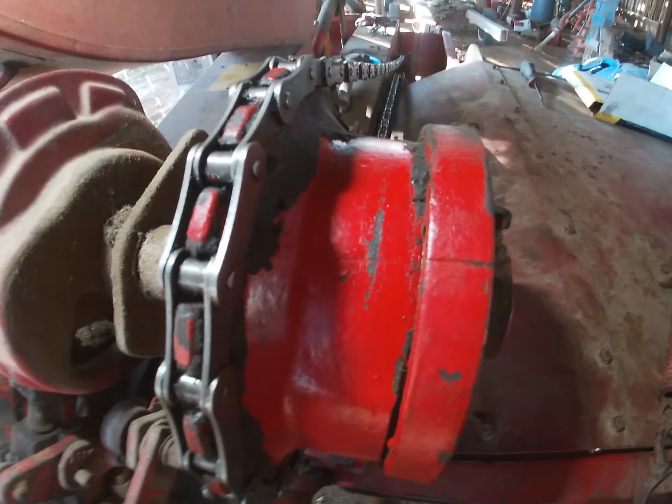I want you to look here. We finally got the son of a...

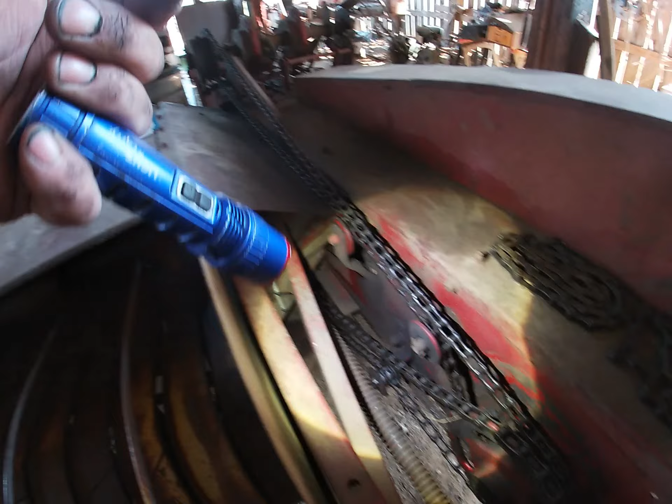And then this one, what is this one even? A 50? Don't say. Now I gotta look. 2050. So yeah, that's what I was gonna do. I was gonna replace the one for the pickup drive here and this one. I could possibly take a link out of this, but I would just as soon replace the whole chain because, well, then I'll know what I got.

I was having a little bit of issues late last year with knotting and whatnot, so timing was a problem because we busted a set of needles that already went to the scrap. So anyway, we are going to make sure that we get this. We're going to replace this chain right here.

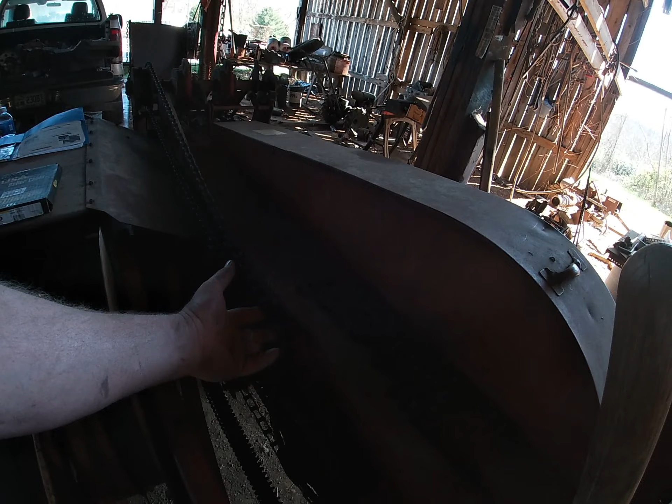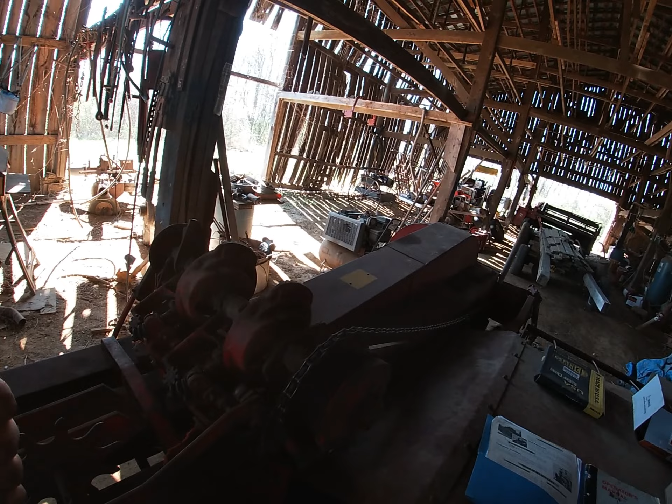I brought the manual so I can figure out how to time it, because I know we'll have to time that. We busted a set of needles, so there you go. It was out of time. And that is the chain that drives the knotters. So anyway, next up, I gotta read the book and tell you how to time it.

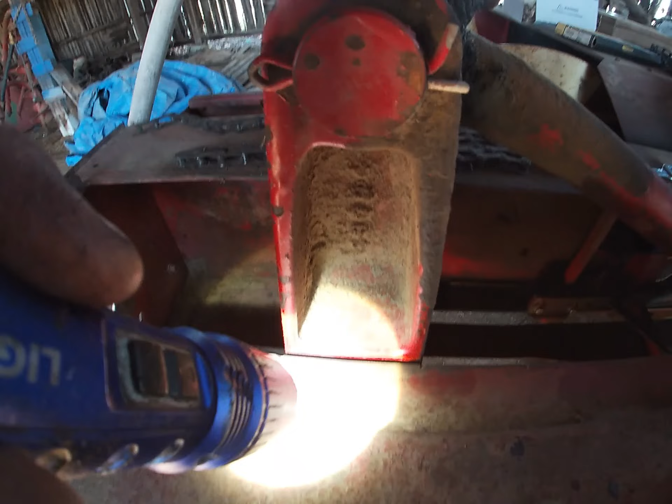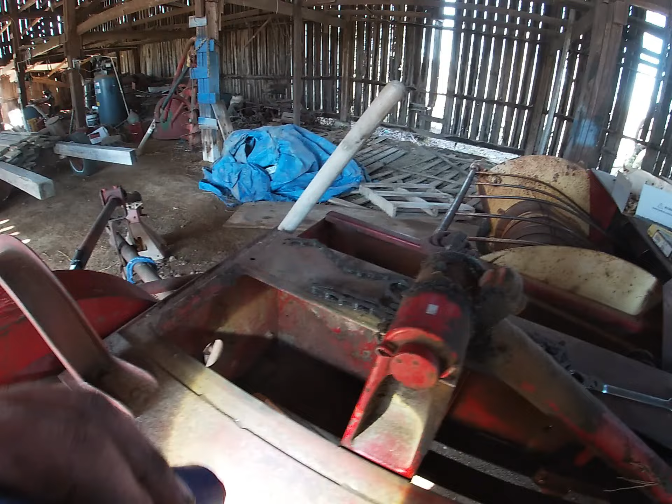All right, so step one, remove the knotter drive chain, which I did. And then place the crank here in this position between, hopefully you can see that mark and that mark. So we're pretty much between there. I used this old tobacco stick and jammed it in there so it wouldn't turn on me while I was messing around here, because I don't want it to turn. That would be bad.

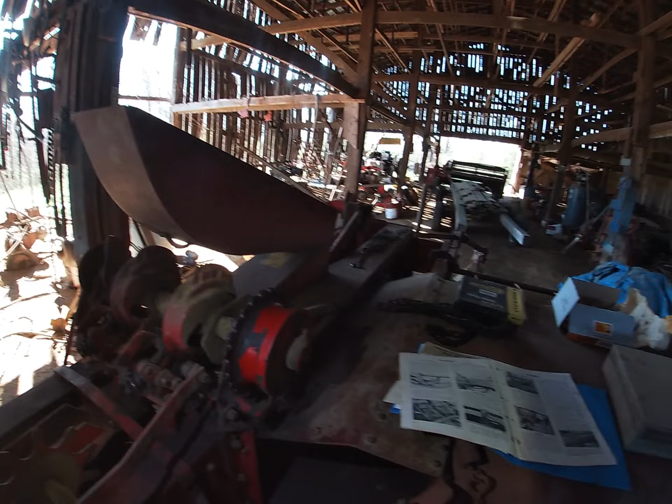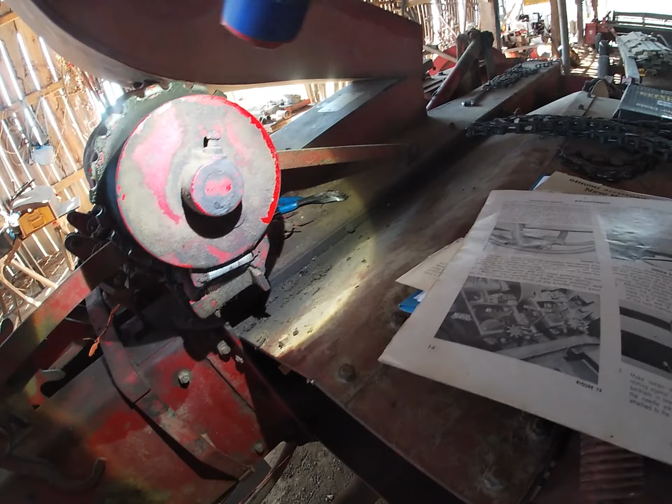Then what's next? Make certain that the knotter clutch pawl, that piece right there, is against the knotter stop. So it is, it's right where it's supposed to be. When you get your length of bale that you want, it trips and then lets the knotter clutch rotate, okay?

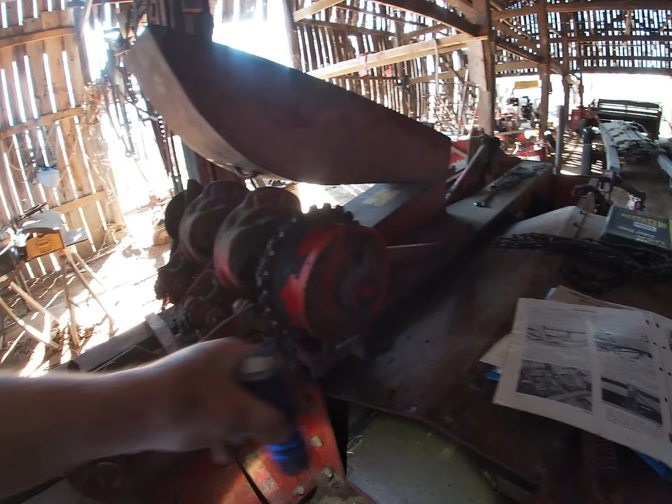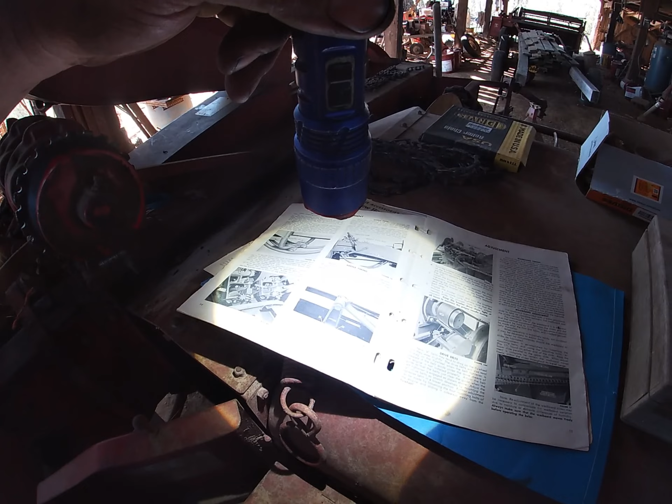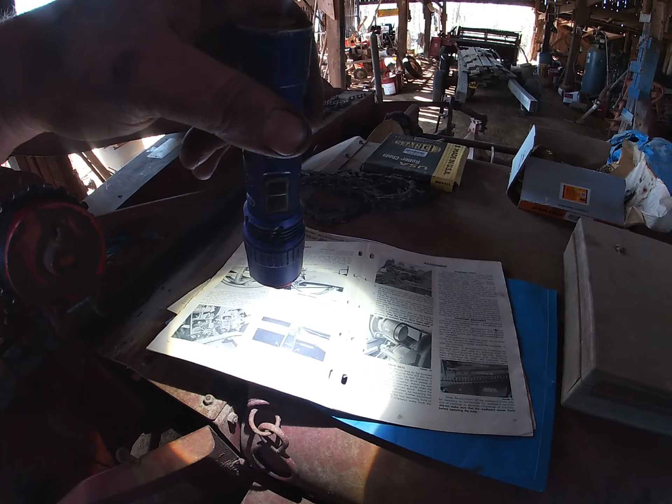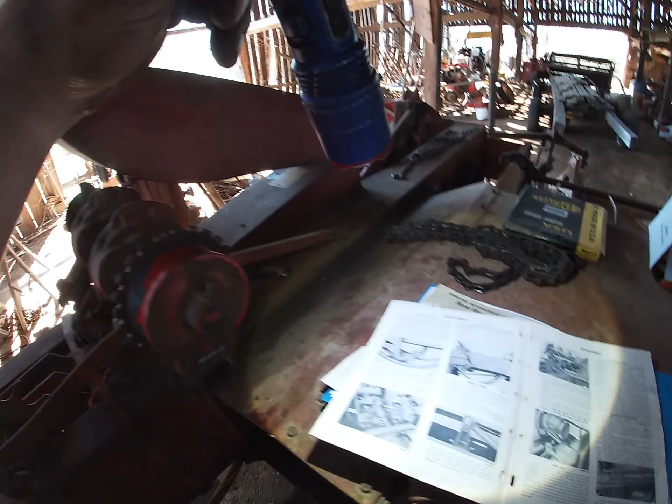So, remove the backlash in the knotter clutch by pulling upward on the needle yoke rod at the point where it is attached to the knotter arm. Knotter arm needle yoke rod is up here. Okay.

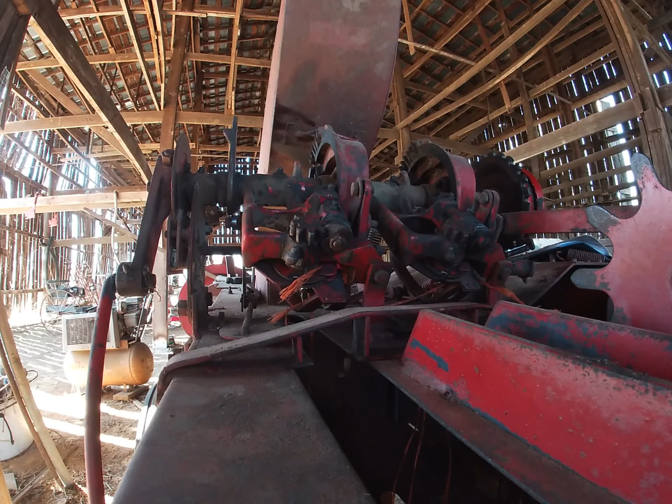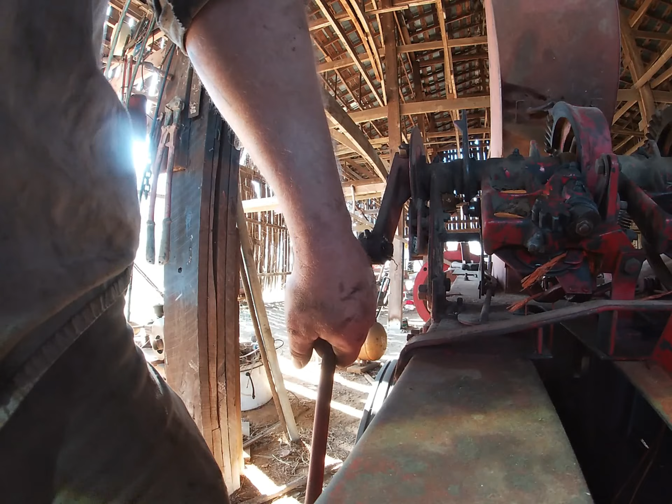So it says pull up on that. Yeah, I'm kind of learning this as I go because this one is different. So, okay, so that should be backlash removed from there.

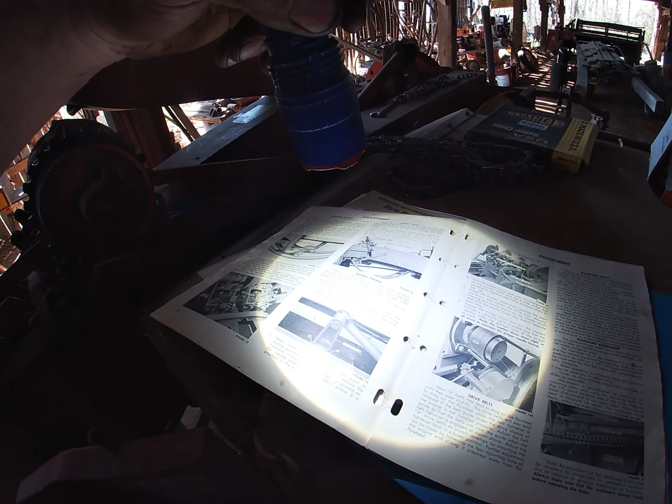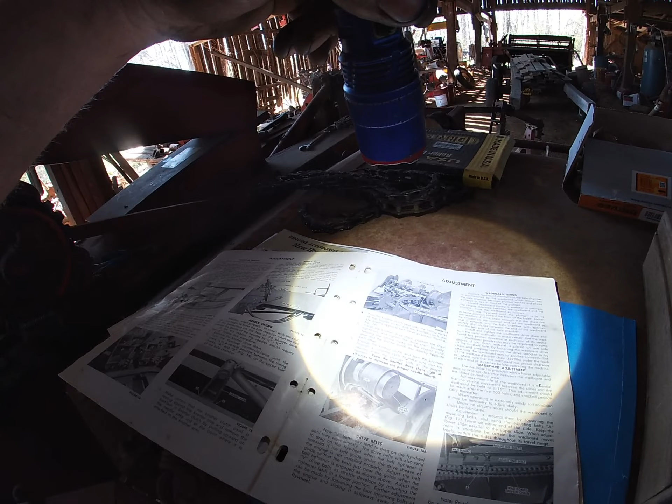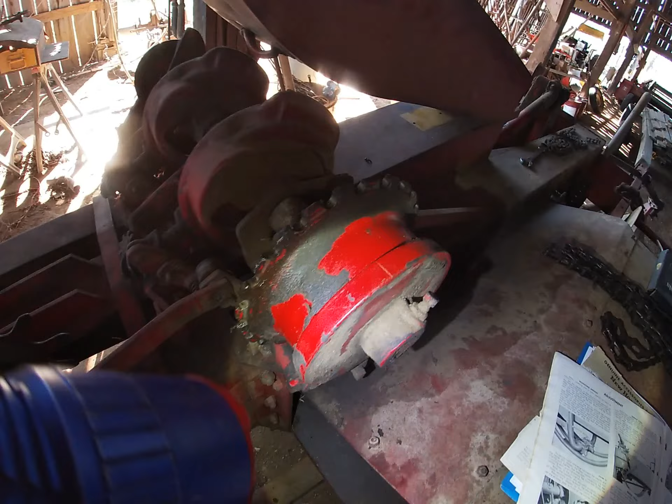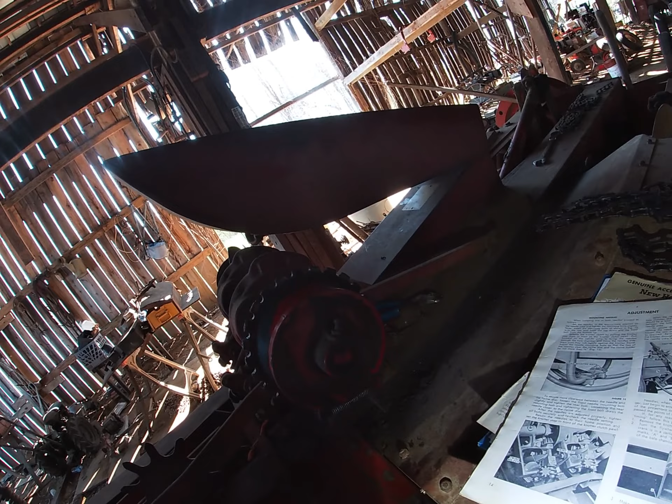Turn the knotter clutch gear until the timing marks of the knotter clutch and the knotter clutch disc are directly opposite of each other. So we're going to line up the timing marks like it shows in this picture. So anyway, there's one mark. And does it say which way? No, it didn't. So anyway, by looking at their picture,

well, let me find this. Okay, so marks are aligned. Should probably get a paint pen so we can see that better. Well, you guys can see it better without the light. But mark. So marks are aligned.

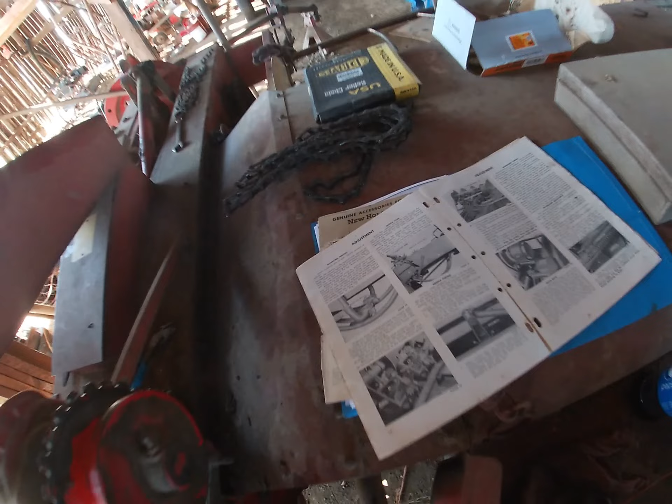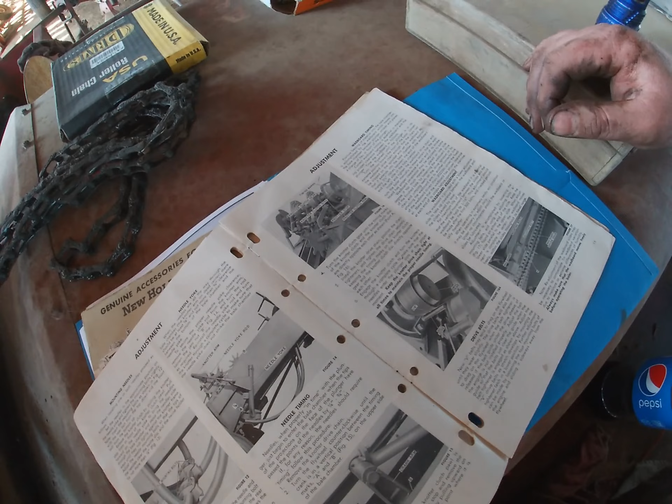Install the knotter drive chain. Position the chain tighteners and tighten the drive chain securely, keeping the timing marks on the knotter clutch gear and the knotter clutch disc directly opposite of each other. Okay, so now I need to put the chain back on. That's fairly simple for timing one of these.

Actually, I've seen, I don't remember what model New Holland baler it was. I think it was a 315 for some reason.

That, you know, it had to be within 1/4 of an inch of something, and it's like, okay, that's lovely, but whatever. So yeah, next up for me is I got to put the knotter drive chain back on, and then we should be able to cycle it and make sure nothing's hitting as long as everything stays in time, in theory, right? So then I got to make a chain, which we might cover that process another day.

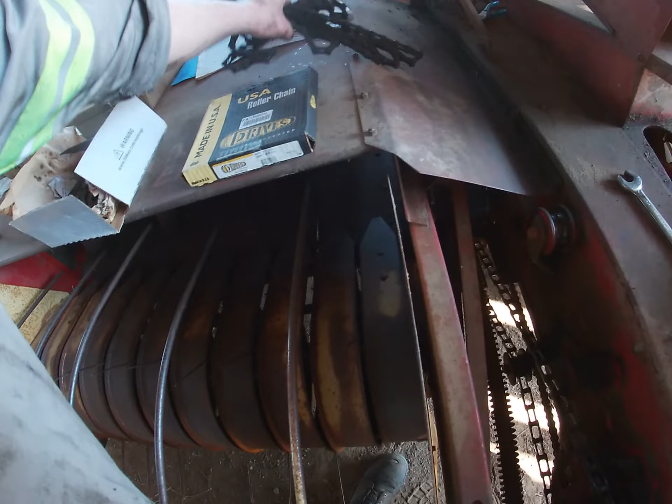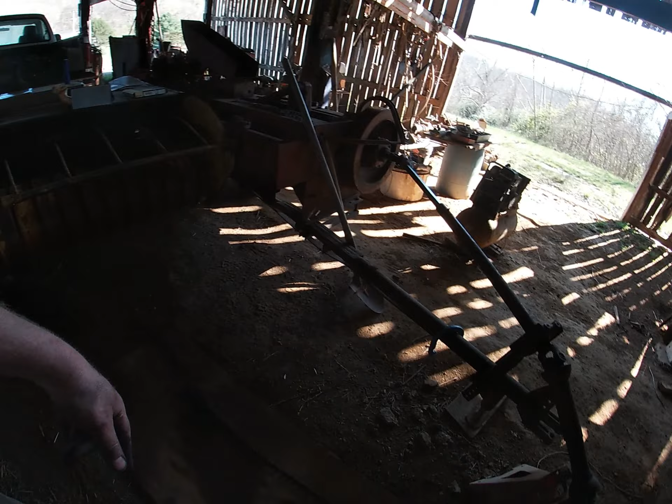But anyway, we're just gonna lay them out on this board here and count the links on the old one, which is this one, and then get the new one and count it out, and hopefully we don't have to add to it, but we'll see. This is a 10-foot, or well, rolls of chain come in 10-foot pieces. So anyway, may use that. That's longer, be easier to deal with.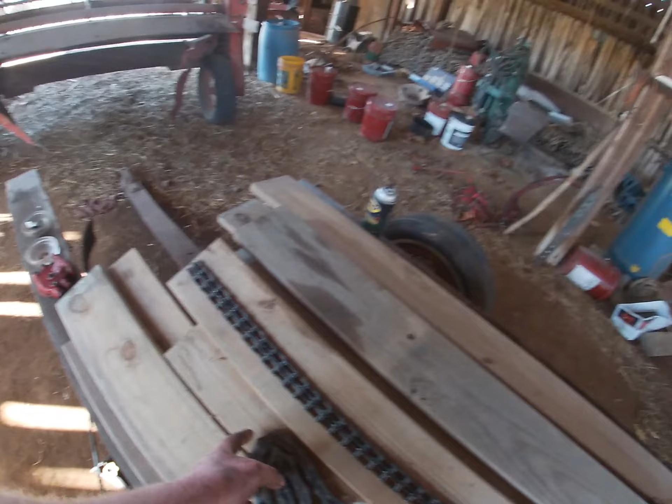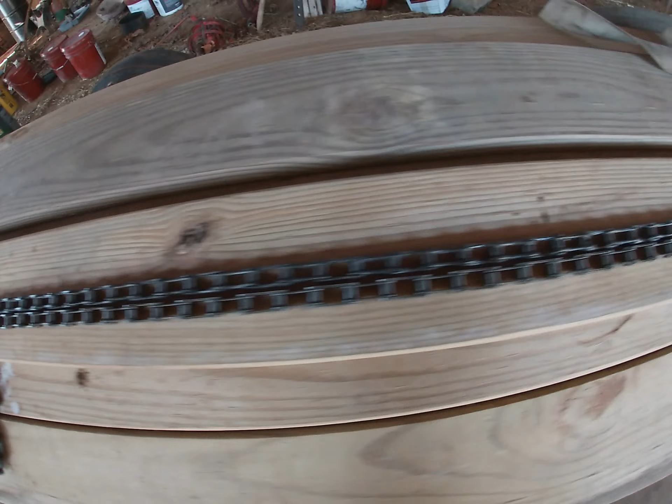Okay, so just a quick point about chains. You can see that's in line right there. And then the farther down the chain we go, the less in line it is between the old chain and the new chain. By the time we get down here to the end, it's a full pin width off. That's how much wear was in that chain.

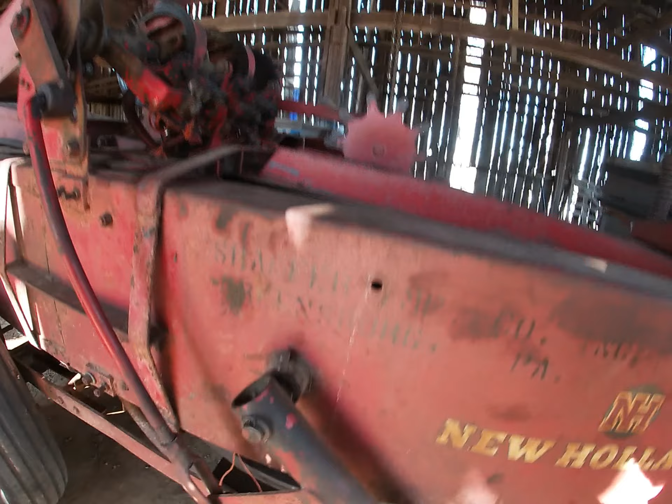I'm not knocking it at all, because I believe, anyway, if I can find the red paint on it, there's red paint on this old chain, so it may very well have been the original chain. Matter of fact, I pretty much guarantee you it's the original chain, because this is the original paint on this baler. If I can find, okay, here it was stenciled where it was shipped to originally. Shaefer Implement Company Incorporated in Greensburg, Pennsylvania. Hopefully y'all can see that.

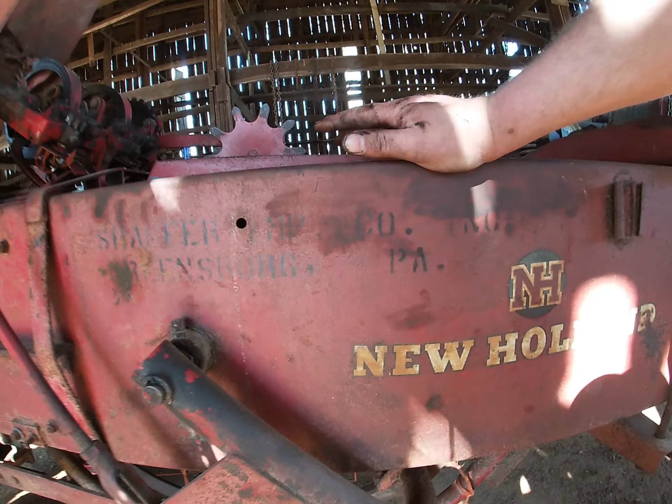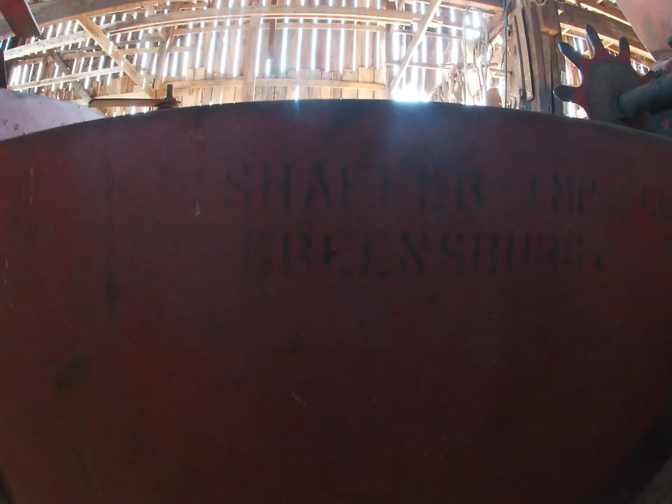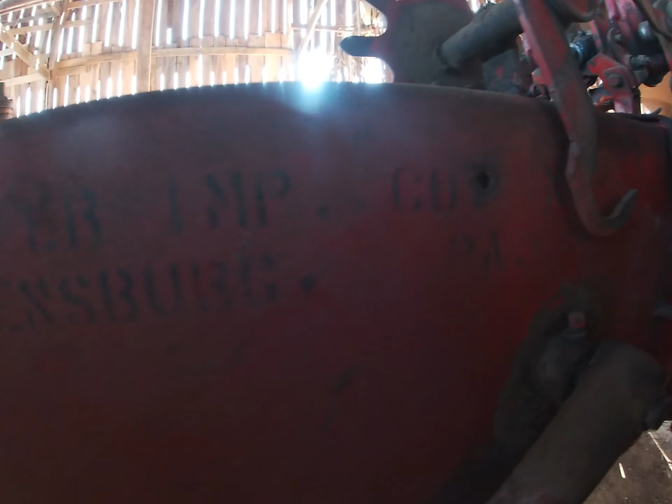For something that's come out of the late 50s, I'd say it's done pretty well for most of its life. I think the stencil on this other side is even better yet, but probably not as visible because it's dark over here. Well, anyway, let's see. At least I think I'm spelling that right. Maybe it's Shafter, I don't know. But anyway, you can see it. Shaefer Implement Company, Greensburg, PA. So, I brought that up in one other video that I've done about this thing.

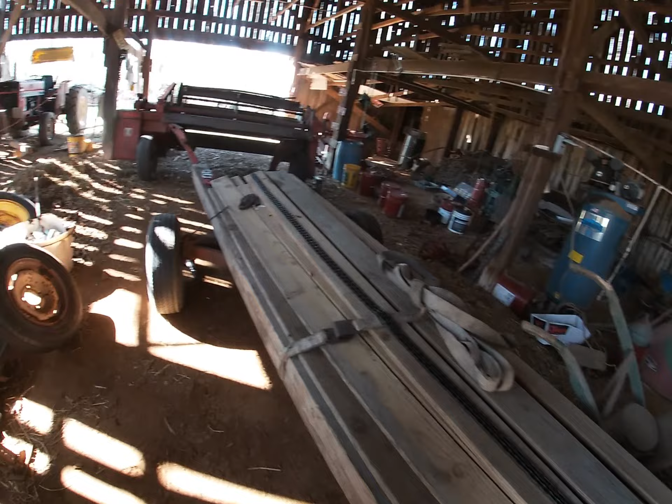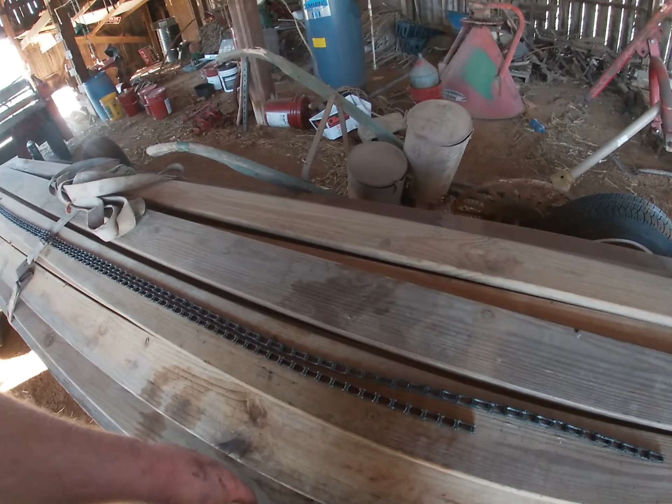But as I said, that may well be the original chain, and if it is, it's survived quite well over the years for what it is. But being that much extra slack in that chain, and as loose as it was with the tensioner pulled all the way up, well, we were having problems. So hopefully this will solve it. And yes, if you hadn't noticed, I am going to have to add to my chain. We're going to go back with counting links. Don't ever measure a chain, because you'll end up with too much chain and have to put a half link or take a half link out. Count the links on a chain, because that way you know you got it right.

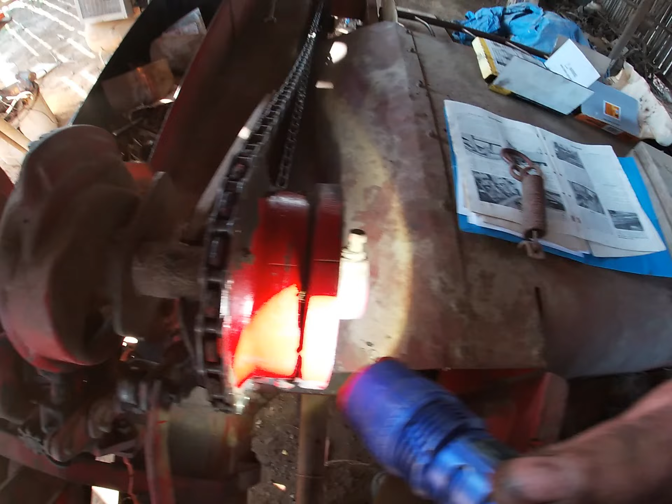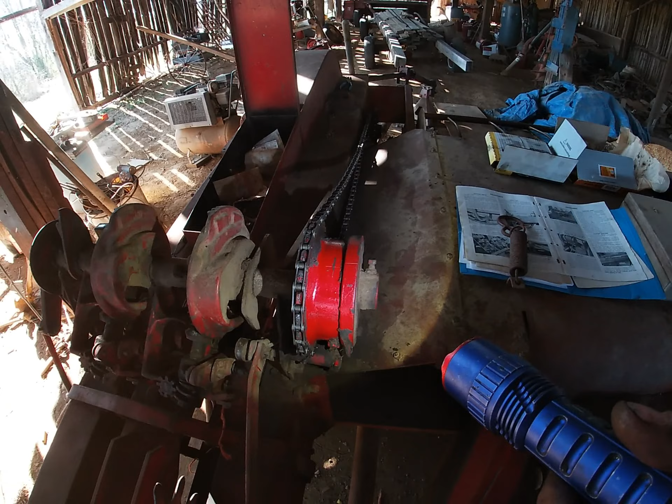All right, so we got our new chain installed. I have not adjusted the tensioner yet, but it's installed. And our marks are just a little bit out of line there, so that's good, because when I pick up on the tensioner, it should pull that the right way, I think. If not, then we'll have to split it and jump it a link and then tension it again and play with it until we get it to where it lines up right. Let me tension it and see what we get.

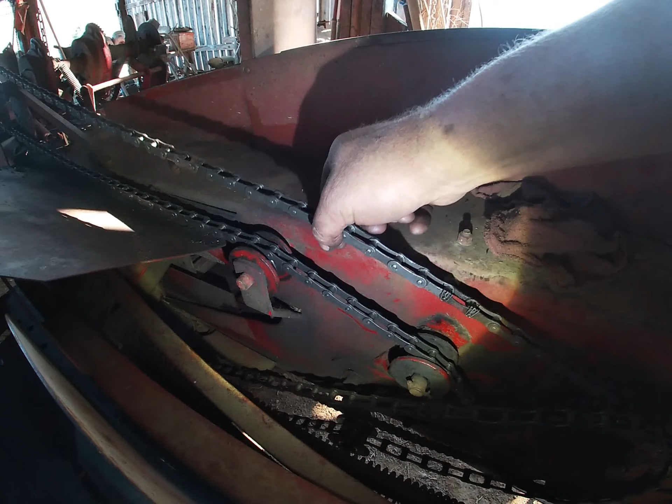All right, so I got my tension where I like it. There's still a fair amount of slack in the chain, but it's not going to jump a tooth or anything like that, so that's good. But of course we have a problem. Imagine that. There's always got to be a problem, right? My timing marks didn't line up. So we're going to have to pull this ahead, skip it a tooth, basically.

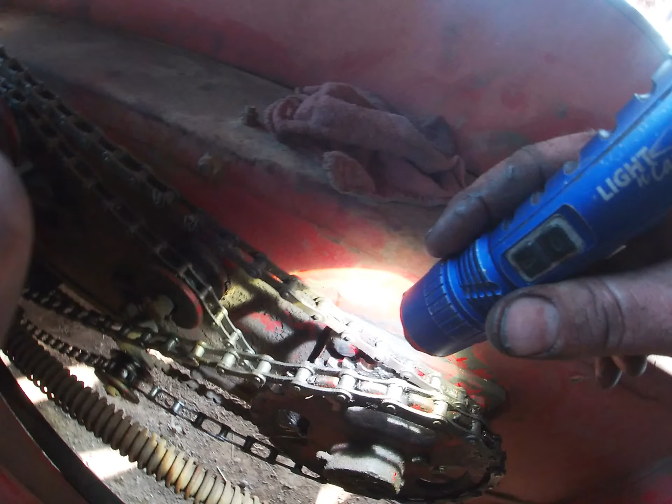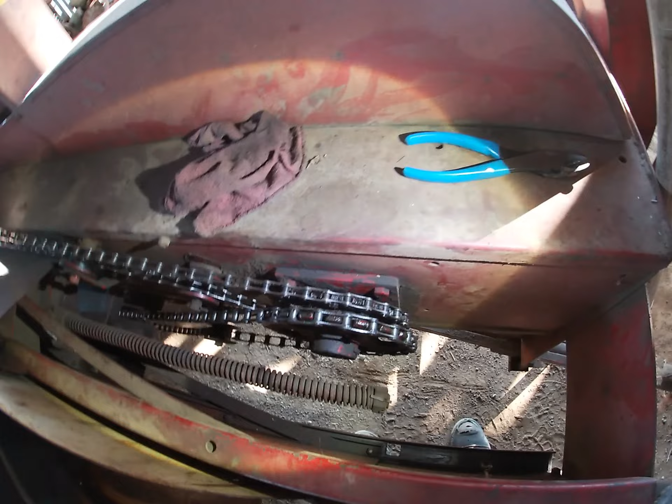But the one thing about this 2040 chain, or well, about the way this one's set up on this end, is this is a regular old number 40 sprocket. It's not a 2040 sprocket. So you can jump it a tooth and have it be where it needs to be, hopefully. At least that's what we're going to go with.

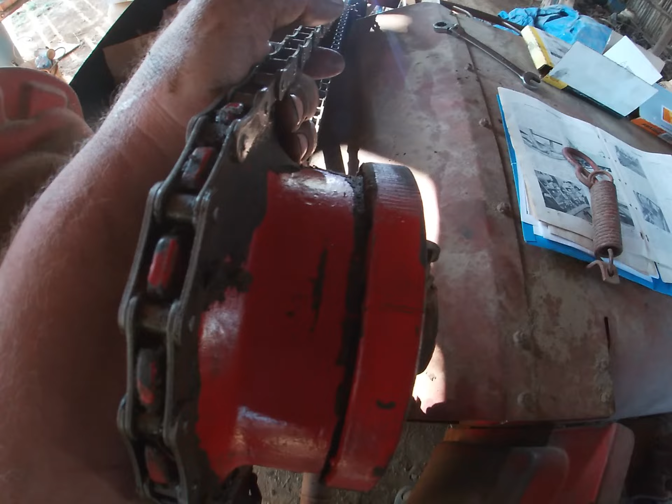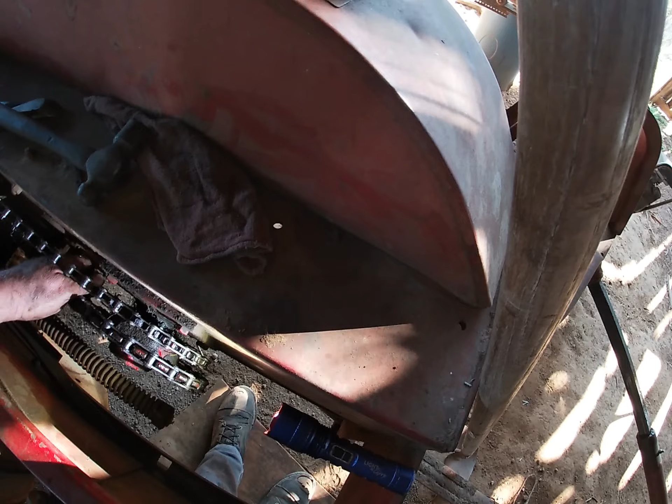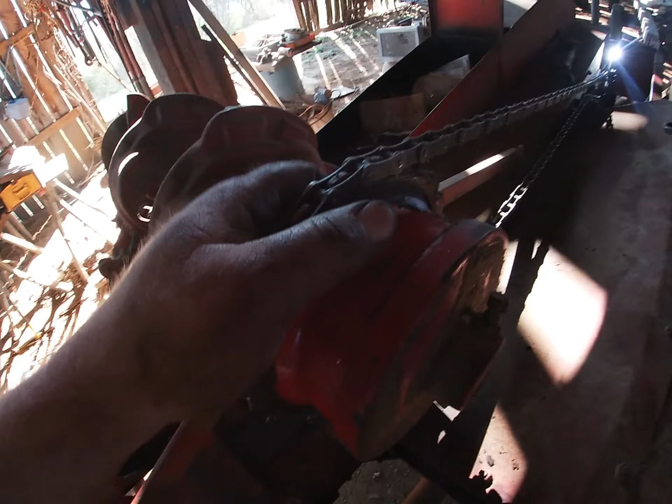So we're still not quite right. Interesting. Although we do have some play here, but I don't know how that's going to work out. I've got a loose shear pin down here. I don't know when that loosened up, but anyway, it's probably been giving me some issues as well. Imagine that, issues, right? But, you know, we're close, but not quite.

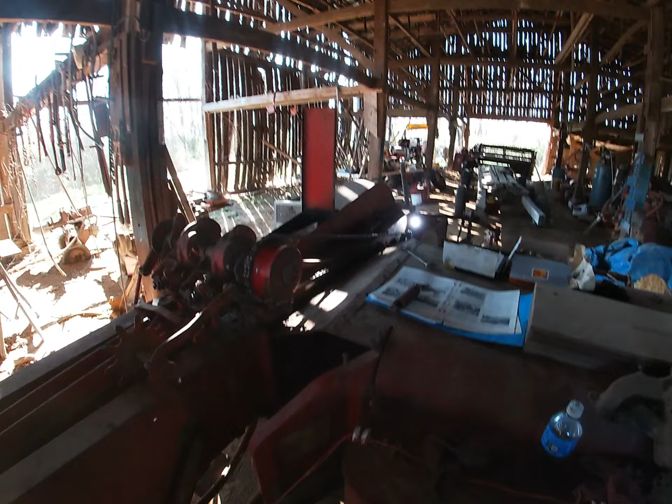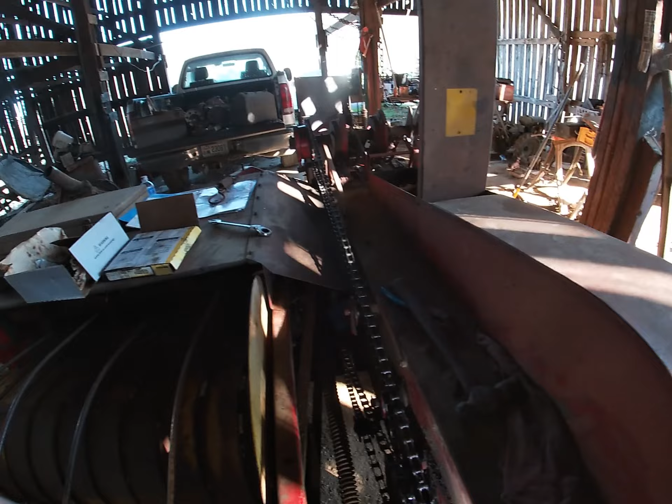So basically, I think we're just going to have to turn it a cycle through by hand until everything lines up again and see where we are. That's going to be the simplest thing to do. So let me do that and then we'll see what we come back to. Actually, let me hook this up first, then we'll see what we get.

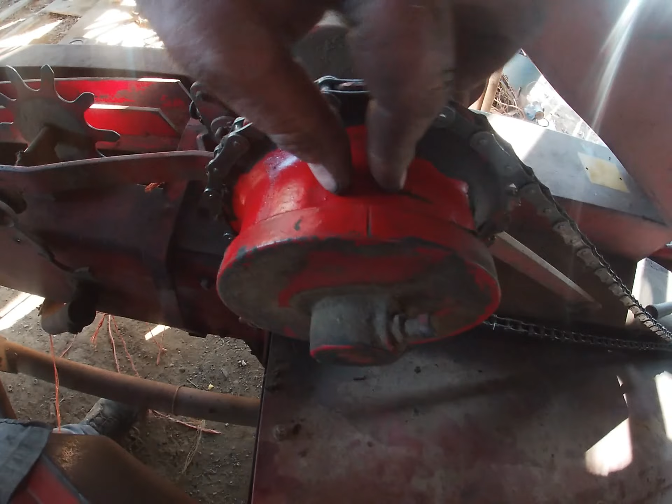Okay, so I spun it around twice just to see, and now we need to come back the other way. Mark, mark. So it's moved that far forward on us. So now I got to take it and jump it back one tooth on that sprocket and hope that we'll get it to line up right. It'd be really nice if it would anyway, right? So, yeah.

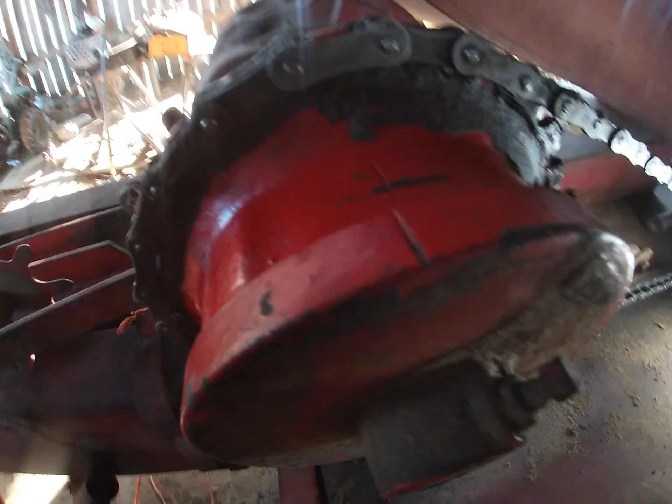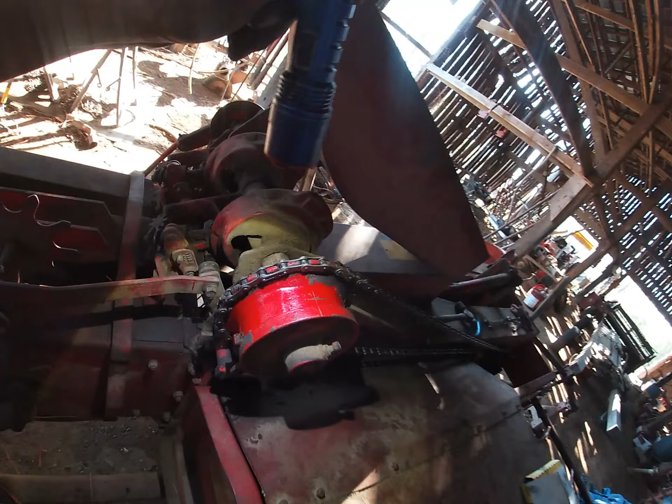Okay, so we did all that, and then we still end up a little bit off, basically, you know, that 1/8 to 3/16 of an inch off there. So, yeah, that little bit. So we're going to try and actually cycle the knotter this time and see what that gives us.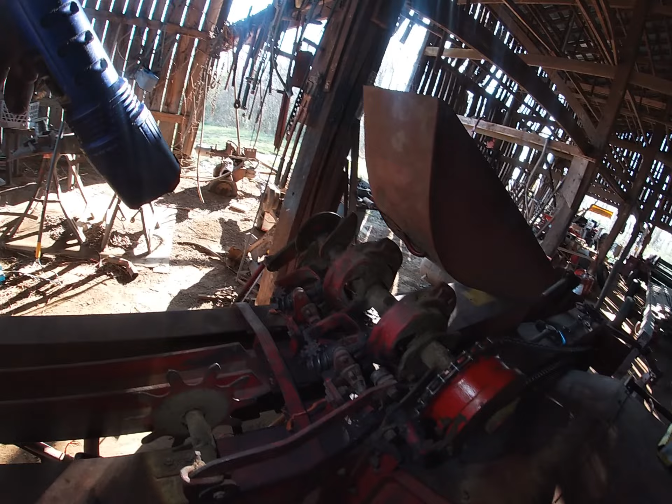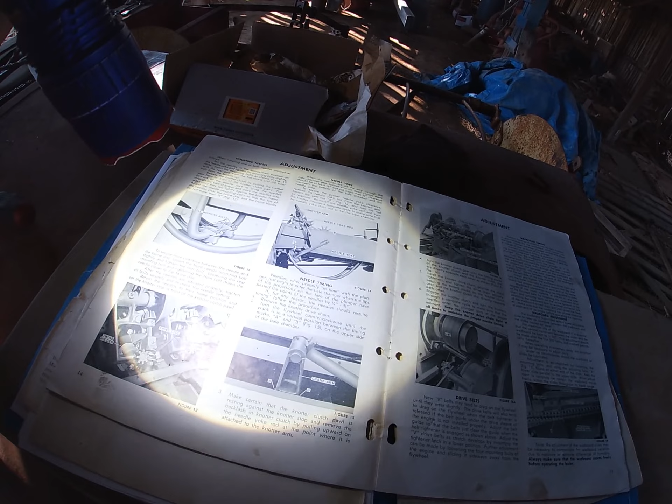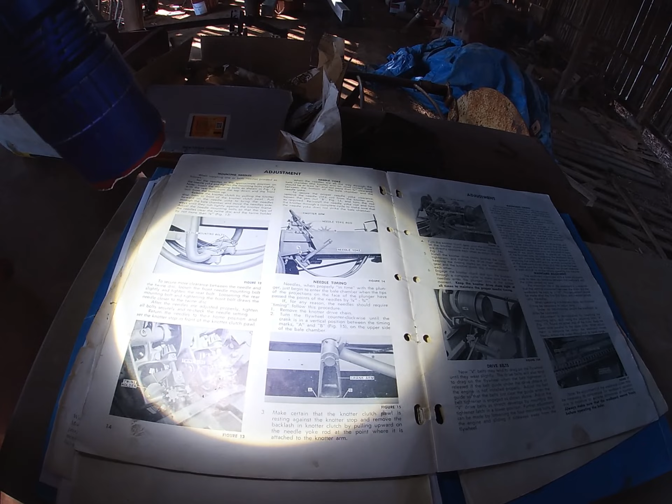So needles, when properly in time with the plunger, just begin to enter the bale chamber when the tips of the projections on the face of the plunger have passed the points of the needles by a quarter to 3/4 of an inch. Okay, so we're going to trip the knotters and turn this thing slowly and see if and when we, well, let's see.

Yeah, I guess they're talking about the little ramp looking deal at the bottom of the plunger as the projections on the plunger. So they should pass the tips of the needles at about 1/4 to 3/4, so 1/2 inch. So this should be fun to find, but anyway, let's see what we get.

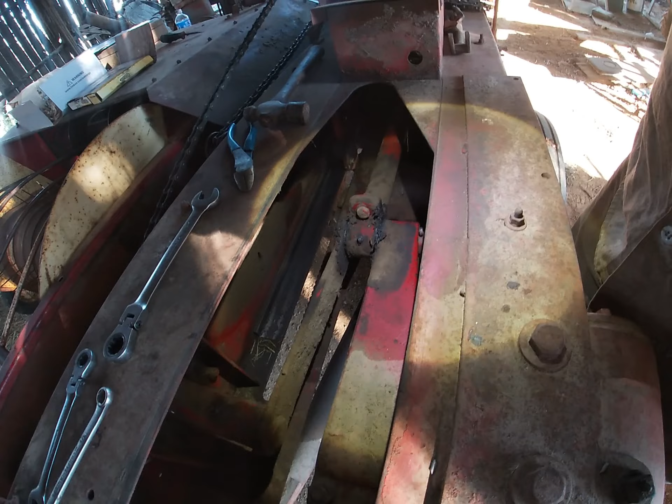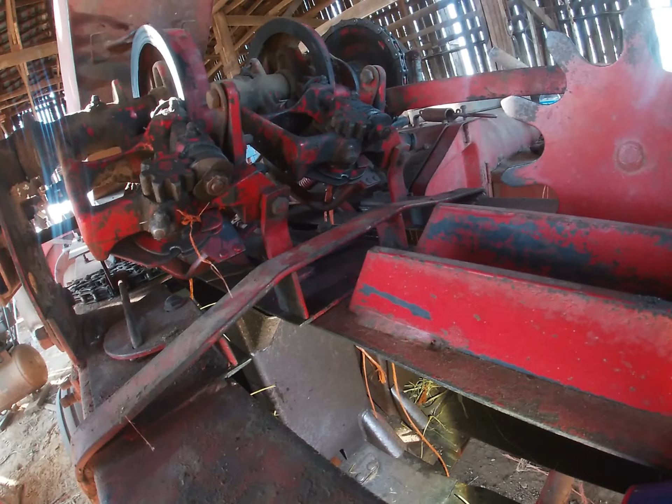All right, so my plunger is as far back as the plunger goes, basically. Our crank and connecting rod are at full stroke towards the rear of the baler, so that's as far as it goes. Okay, and we haven't hit anything yet, so I'm going to say that we are okay that way. Now, you know, allowing for this thing 60 years worth of wear and whatnot. So let's continue the cycle here and see where we end up.

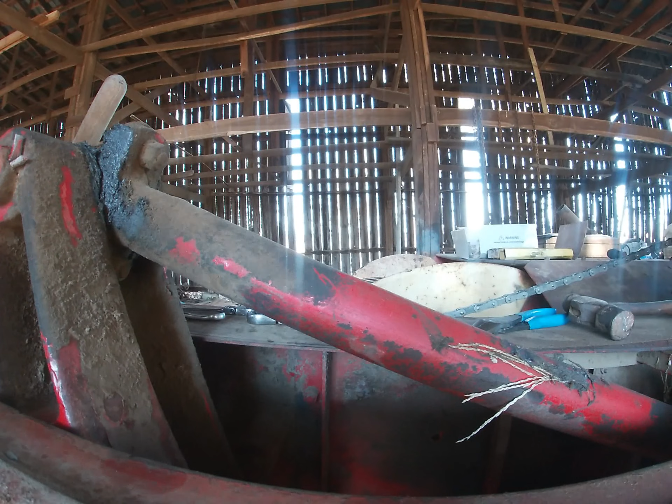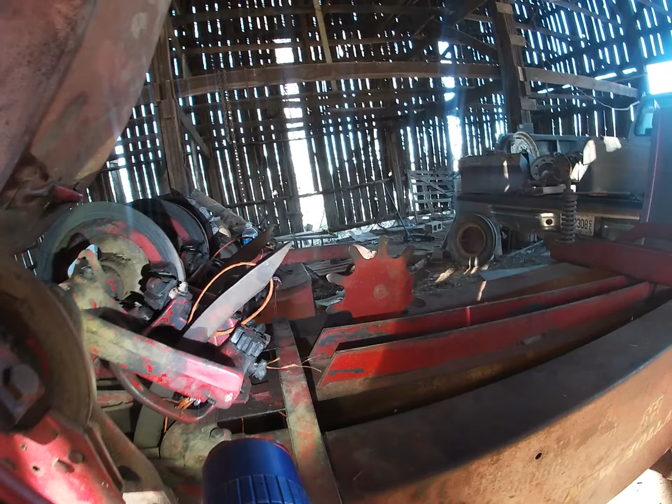Well, what was that, I wonder? That didn't sound good. Something hit something, let's say. Okay, so I need to adjust this needle here. It's sticking out too far. That one's up too far, so we will have to try and back it down just a little bit and make it even with this one, hopefully, or maybe try and bring the other one up. But let's see, can't see if we're rubbing on the twine fingers or not anywhere. So anyway, keep turning, I guess.

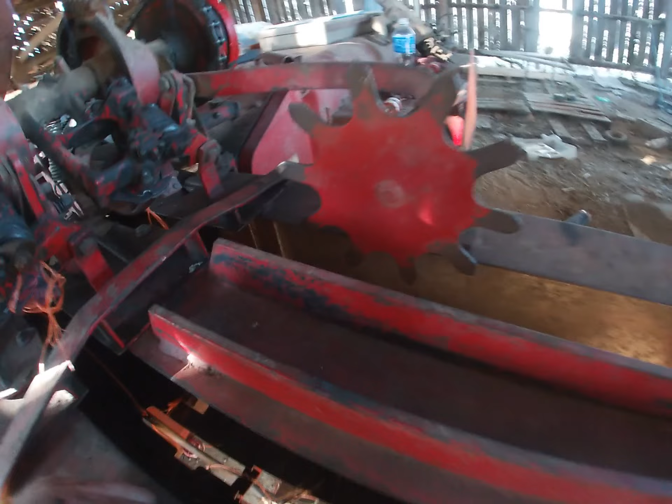What was that? It just hit. Sheesh. This thing is all kinds of trouble today. What's going on here? And we ain't even got the wad board moving, I don't think. Can't tell, but I don't think we do. Nope, we don't. It's not moving because it's not tied in.

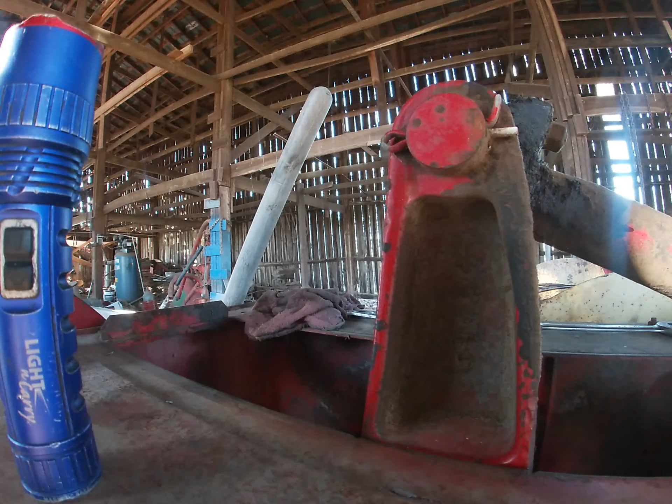So anyway, make sure that my knotters seat back, which they just did. Bring this thing up and around again to where it's supposed to be at. Right about there, basically. Put my chalk in again. Okay. Let's go see where my marks lined up at, or if they lined up at all. Farther off than we were before.

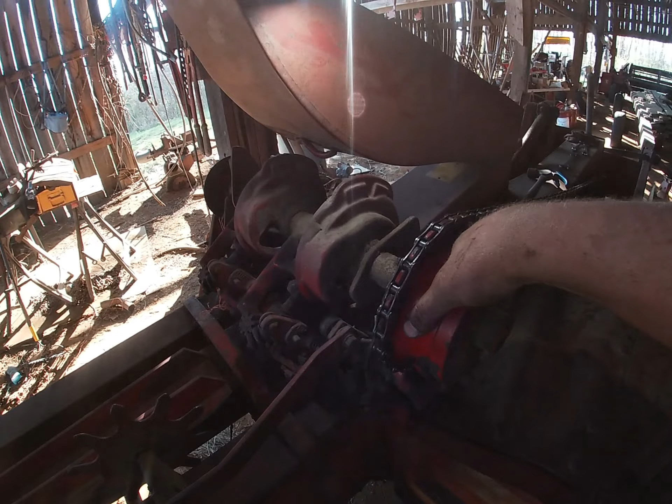Trying to find out where you guys can see and I can see and all that good stuff. It's just not working out for me. So let's try this instead. So anyway, mark and mark. It's farther off than it was before now. So I wonder then if I were to just bring this thing back and then reconnect my chain, what I would get that way. But it's one of those, you're going to have to play with it to make it work right, and it's not a whole lot of fun. But anyway, you get the idea of what I'm up against here at the moment.